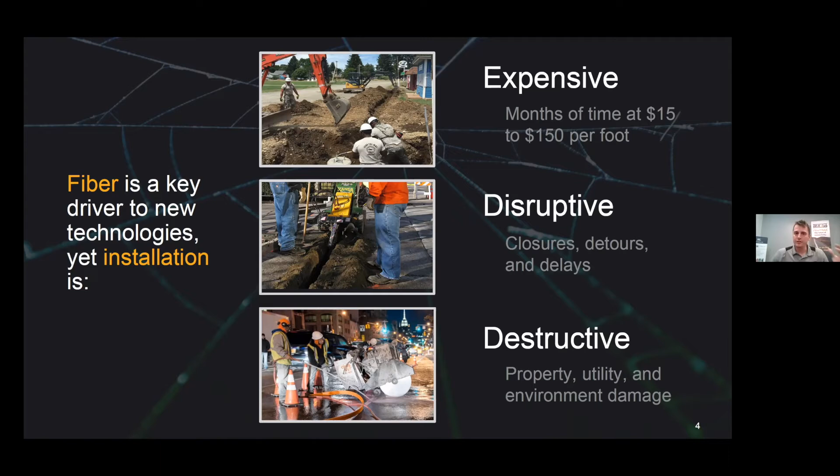And then once you cut into the ground, it's destructive, and now you have to repair and resurface the road, and it's just a mess, and it's very time consuming and very, very expensive, especially if you're in places that have a lot of rock, or in these urbanized, densified zones that have a lot of other infrastructure in the way. And so that's really where our solution comes in, and we call it FiberTRAX. Essentially, what we're doing is painting optical fiber directly onto paved surfaces without having to cut into that surface. And so we have these resins and fiber cables that we bond to the pavement.

And we started off, my co-founder and I, crawling around on our hands and knees, trying this out, and quickly discovered that we really needed a machine to help us automate our new discovery, this FiberTRAX discovery. And so we built a machine that we call the FiberTRAXter that automates our installation process directly to paved surfaces. And I'll talk a little bit more about what that does.

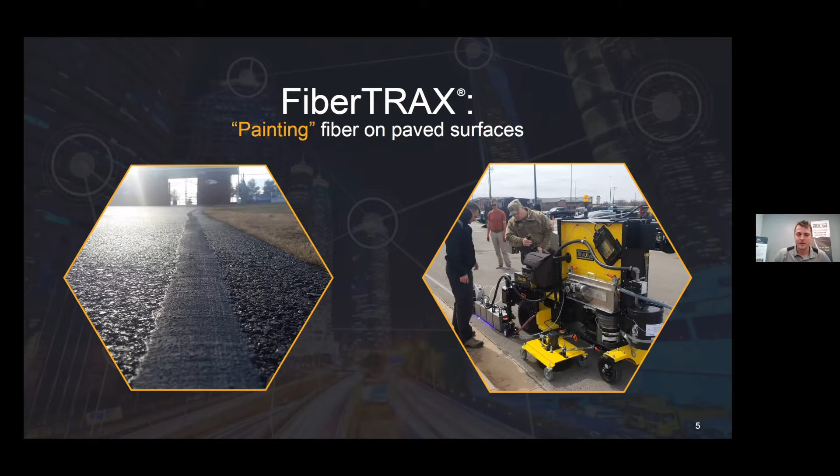So this problem really started when my dad couldn't get internet out to his house. He lives in a somewhat rural part of Virginia. He asked the ISP to come out and bring him service, and they basically laughed and said, "You'll never get fiber out to where you live." But they used the road to drive out to my dad to tell him that. And so that's really how the idea began: could we just paint a line using the road, not look at roads like obstacles, but really look at roads like pathways to utilize.

And so what this does by using roads is it provides a fiber installer a much more efficient means to bring a connection, where they can install basically same day or on demand. And I have a couple case studies I'll talk about where we did that. But it adds a level of convenience and versatility that traditional installers can't rely on, because they're now using what taxpayers have already paid for, the road infrastructure.

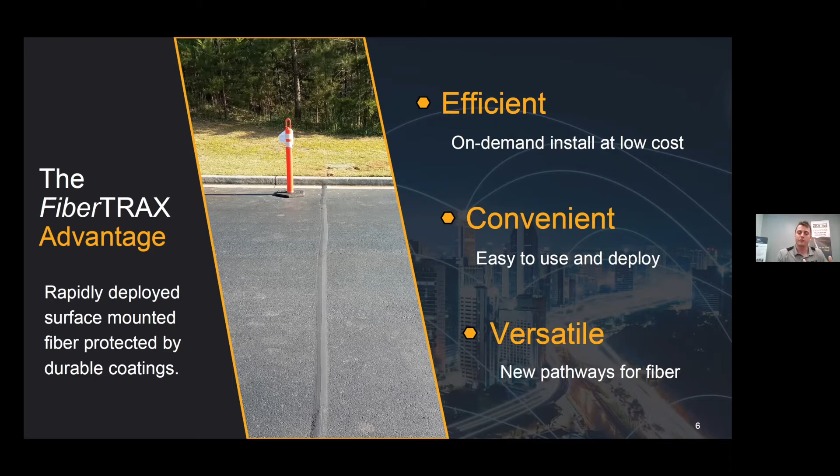We're getting to dual use that road now and provide a pathway for digital communications like optical fiber. So this is kind of the cross section of what it is. It's not really paint. We're not just painting a line that provides connectivity. In essence, we are, but what we're doing is taking a very low profile fiber cable. In this case, it's a 3 millimeter cable.

We're bonding it to the surface using a very, very fast, quick curing resin that bonds in seconds. We call that our elastic bond coat, and it's holding that cable in place. Then we apply a second coating, another resin. It's another quick curing resin, but something in the order of 20 to 30 minutes to fully cure on top, that is colored and blends that bonded cable to the surface and provides an extra layer of durability to the installation. And that's basically what it looks like from the side view.

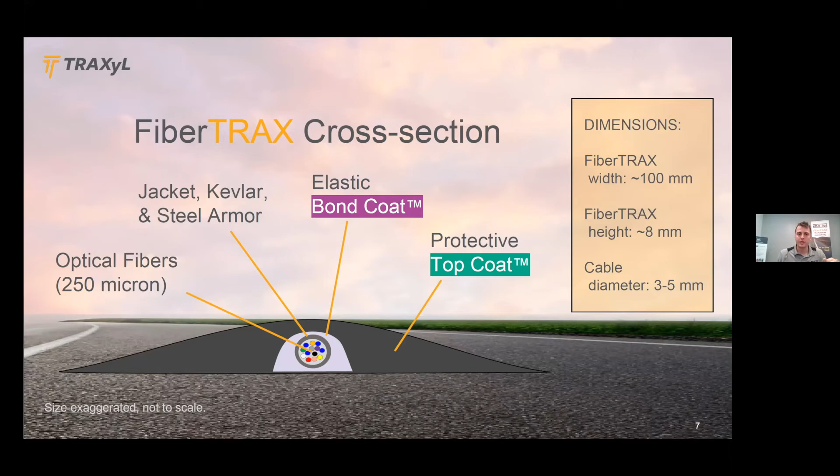Now the thicknesses again are very, very low profile, and they're ADA compliant. They're about the thickness of a crosswalk paint line, if you think about the thicknesses of those thermoplastics that they bond to pavement. So we're talking very, very low profile here. What this enables us to do is actually install in areas that have snow plows even. Obviously nothing's going to stop a snow plow if it's gouging into pavement, but by feathering the edges, ramping them, keeping the profile extremely low, we've actually had multiple installations that have had snow plows run over the lines and not cause problems. So we're pretty excited about being able to live in this new right-of-way that we've discovered, which is right on the surface of the road.

If you look at other conventional methods to bring fiber to places, you're either putting them on utility poles, or you're trenching, or in some cases micro trenching, or boring, directional drilling underneath roadways to bring a connection. But with our solution, we still provide the same high capacity data. It's not any different than the other fibers and other cables. So you can still splice to it. You can still connect to an existing cable coming off a telephone pole, but it's aesthetic. It doesn't really ruin the view shed. You don't have to put up poles to bring a connection.

And it's also safe to other utilities because we're not cutting into the surface, we're in our own right of way. It really shaves down on the potential damage to those other underground utilities that are already filling up on the sides of the road. And it's on demand. So you can think about installations that can happen that same day. It's a very, very fast solution that brings a connection as quick as people need it to be.

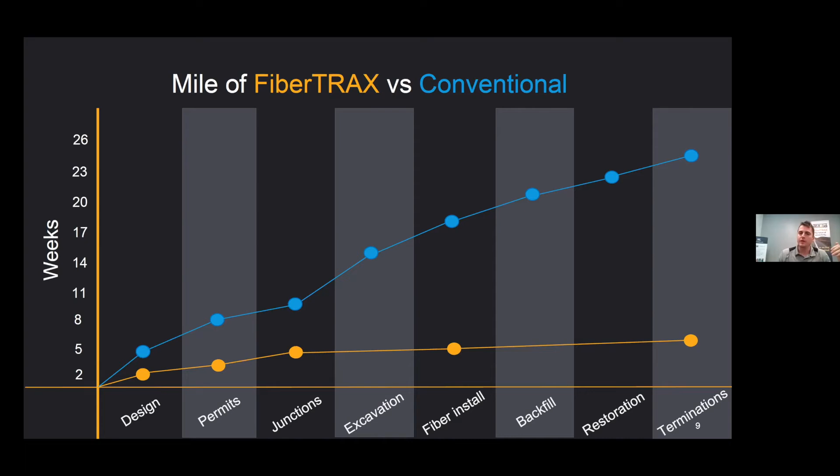So again, looking at a notional installation of like a mile of fiber, we're looking at really reducing not just the fiber installation time period, but we think there's significant savings in time for the design and permitting process. You still would put the same junctions off the roadways in much the same way that you would a conventional installation, where we have to start and end a run, but there's no excavation during the installation. You're laying the fiber down on the fly. There's no backfill, there's no restoration. Then when you get to the terminations, that's all the same too. So you still are splicing or connectorizing those fibers in much the same way that you would conventionally. But again, you're shrinking install timelines significantly.

Where we're targeting our initial customers, we're looking at customers that have these densified urbanized areas, but maybe want to extend an existing network. So campus-like environments, apartment communities, bases, airports, anywhere that they have their own networks that they control and they own the surfaces, and they're really just trying to get a fast and immediate connection made. That's really where we found the most luck with our initial customers. And again, we're trying to help standardize this technology. So we're looking for distributors and other channel partners to broaden our reach and ability to connect to the end users ultimately.

Part of our initial research was funded through the National Science Foundation, where we built a bunch of samples and put them in a chamber where we thermal cycled to extreme cold and hot temperatures. And then we also cycled the humidity. Then we built this wheel fixture that rolled back and forth. We had close to 700,000 impacts. You can actually see the samples are starting to rut just from the sheer pressures and temperatures that we were seeing. We were actually trying to cause failure so that we could predict an accelerated life of how long this stuff would last.

But with a particular sample family that we built, we actually had no failures whatsoever. In fact, that wheel fixture probably failed 10 to 15 times during our testing, and we had to repair it. But our samples continued to pass optical signal through and didn't have any failures at all, even with the rutting. So this really gave us the confidence to go out and install our product. We knew we were on the right path.

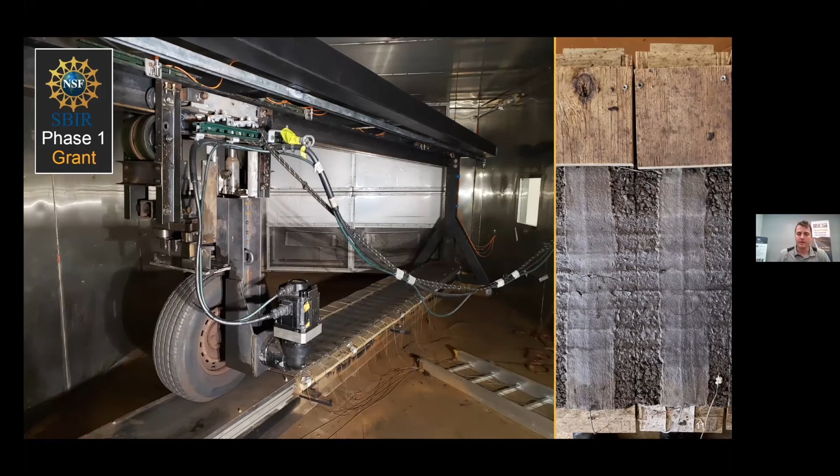We had something here, and so that's what we did. We built an early prototype machine. I built this in my dad's garage, and it was a 2-pass system, but it was something that we used to help a customer of ours, GigStream, an ISP, to deliver internet to 36 apartment buildings in Greenville, South Carolina.

They did all the trench work and connections and equipment they mounted to the sides of the apartment buildings, but they had trouble getting across the drive aisle and parking lot in several locations because of a water main. They had a boring company come out and look to see if they would be able to do it. It was too risky. And so they found us, and we were able to make these 4 separate connections in a single day, to the point where they were actually turning on customers that next week and getting them high-speed internet service.

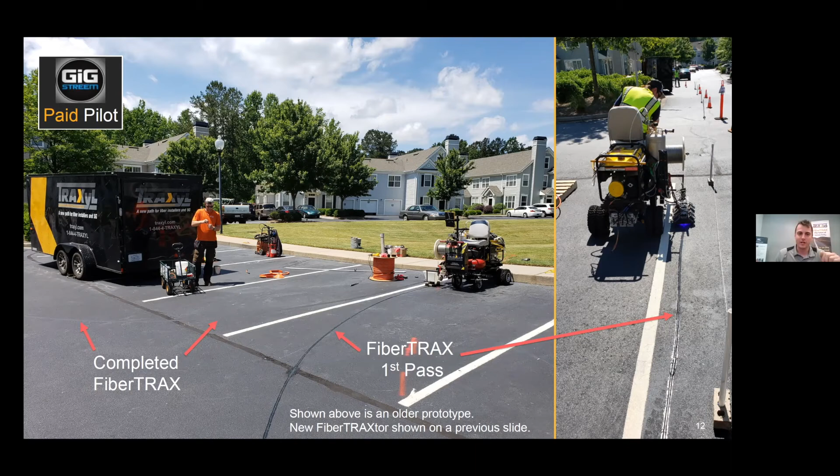And I'm sure, all through COVID and even now to this day, that this is still serving those customers. And we're pretty excited that it's continuing to function, even though we were using this very primitive installation technique. But what this is also showing is the process where we're bonding the cable down in the first pass, and the second pass is that top coat I talked about, where it really blends it into the surface and makes it almost disappear. It's kind of cool to see the early functional prototype still actually providing services to this day.

Another case study we did at Dulles Airport, we had 2 rental car buildings that needed a connection made. There was a contractor that was supposed to make it by a certain date. And if you know about airports, there's a lot of other utilities in the ground. It's probably a very time-consuming, permit-wise process to get permission to trench or dig at an airport. But we were able to just show up and over the course of a night, make a connection between 2 buildings. One of the other challenges was they needed that connection made without disrupting their 24/7 rental car return operations. And so we were able to make this link with people trying to return cars all during that process.

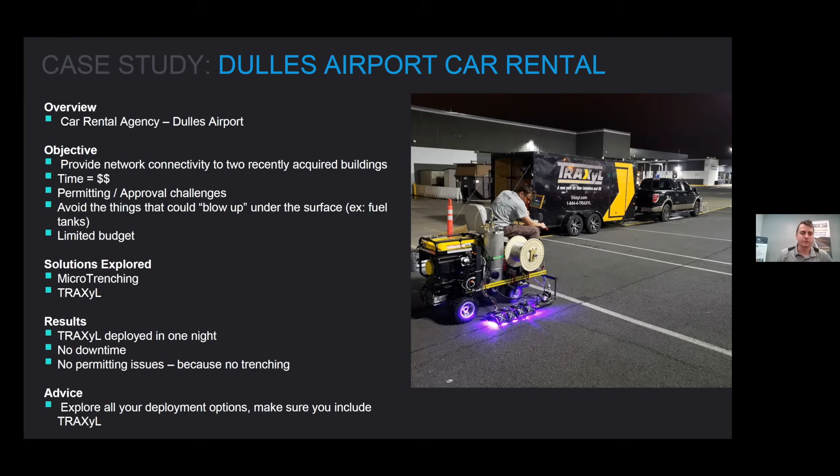We didn't have to cut into the ground, so the permitting process was very easy. The airport permitting team, or whoever they are, just approved it, basically once they understood what we were doing. And we made this connection again in a single night to meet a deadline that one of our customers had. So it was another great use case, another great example.

To continue in that same vein, we had a customer that needed a connection made across a bridge in Ohio. And so we built sort of this custom machine to enable us to go across the bridge. We went on the north side of the bridge and on the south side of the bridge. We engineered how to pass over the expansion joints. And we were able to provide 96 fibers across this bridge. This was last year, and so it went through the winter. We actually had a snowplow run over the line, and it's serving customers in a new community development that went up on the other side of the bridge, and it's also serving a cell phone tower right now. So again, it's just another example of how we can respond quickly to immediate needs and make a connection happen for people.

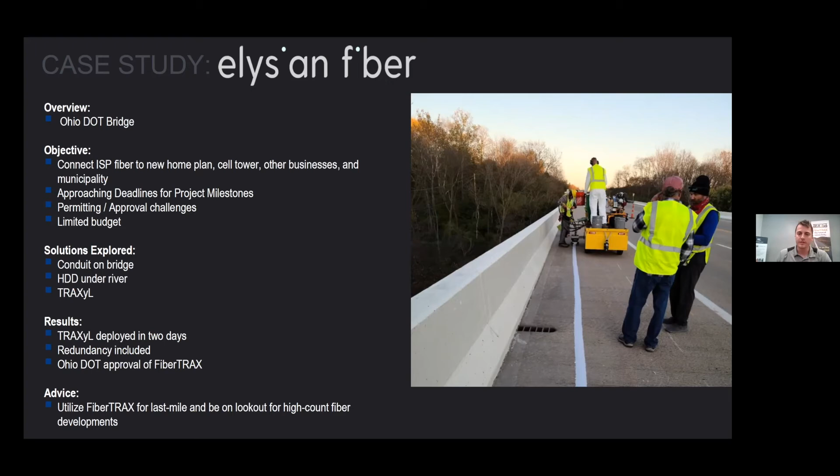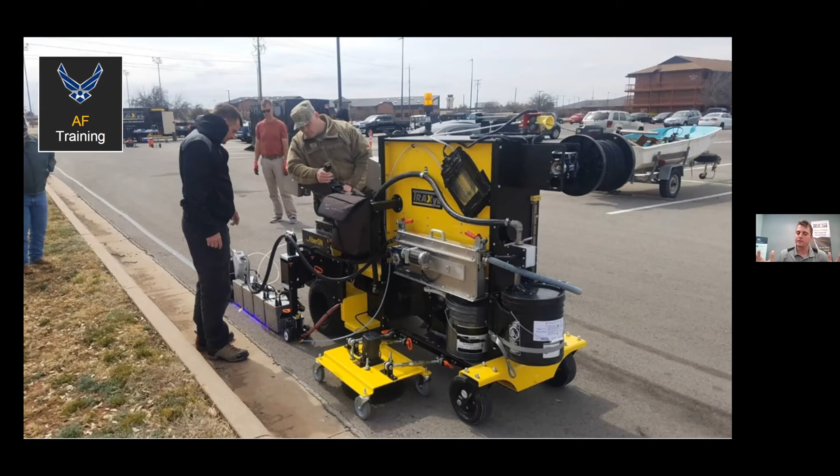We're also working with the Air Force. So this is just a picture of our latest machine. It's come a long way since the garage build prototype. And in fact, it's even different looking than what this picture shows. This is, again, still our prototype machine. We've built 3 of these. Actually, we're taking our 4th machine next week, and we're building one more, and that'll fulfill our 5 contracts that we have, one with the Army Corps of Engineers, one with the Air Force, and then we built 3 machines under a National Science Foundation SBIR Phase 2 to test our commercial customer model and market.

And that leads me to our distribution model, how this is really going to get out there into the world and become a standardized thing. Early on, we were thinking we would be a fiber installer, and what we found is that we were doing a lot of other work that wasn't related specifically to FiberTRAX. So we were running cables in ceilings and mounting conduit and junction boxes and doing some trench work to get to those paved surfaces. And we realized, let's not focus on that.

Let's actually focus on building the equipment, providing the training and certification on how to use it, and then distributing this equipment out to anybody that can use it, whether it's a municipality, a fiber installer, an ISP, providing the tools for them to utilize this technique wherever and however it makes sense for them. Basically providing another tool in the tool bag for them. And so that's what we're doing. We're marching up to our goal of getting to leasable machines.

The Army Corps is very interested in this for on-base fiber deployments, connecting security cameras, and maybe some tactical deployments. The U.S. Air Force is very interested in this because on Air Force bases you don't want to trench, and especially you don't want to trench out to the flight lines where there's aircraft, but those aircraft need connectivity. The people performing maintenance on them need connectivity. And from our research, it's shown to be very, very desolate in terms of connectivity.